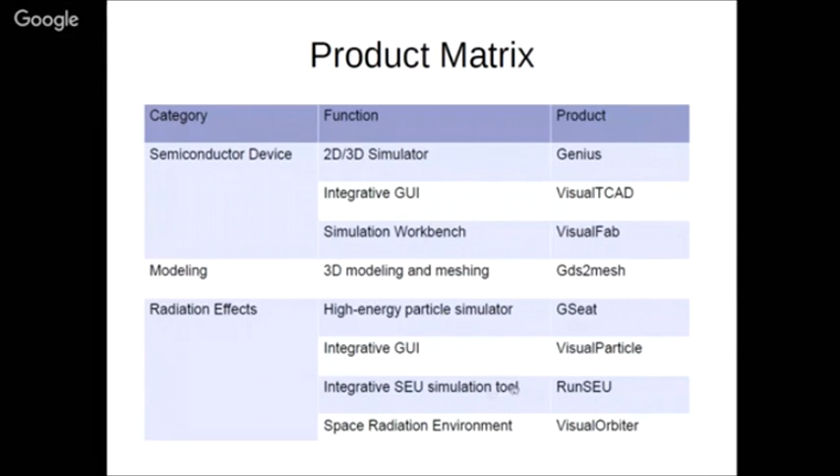What does this tool do? Basically, this tool will model your device or circuit in 3D, like this.

Hello, yes, this is Naresh Kumar from SGT University, Gurgaon. Sir, there is some technical problem, I think. Your voice is disturbing, and similarly the video also has some disturbance. Sir, please reload your session—right-click and reload it. Just a minute, ma'am. I think the mic is the issue. Okay.

Now, basically, GDS2Mesh is a 3D modeler software. It basically provides an environment where you can model a single device as well as a small circuit in 3D.

Like this is one example. Here our tool requires a layout—this is a mask file. This layout file is required as an input file. Customers are free to design the layout in any layout software. We are also providing a layout software named Layout. So you are free to make your layout in this tool or any standard tool.

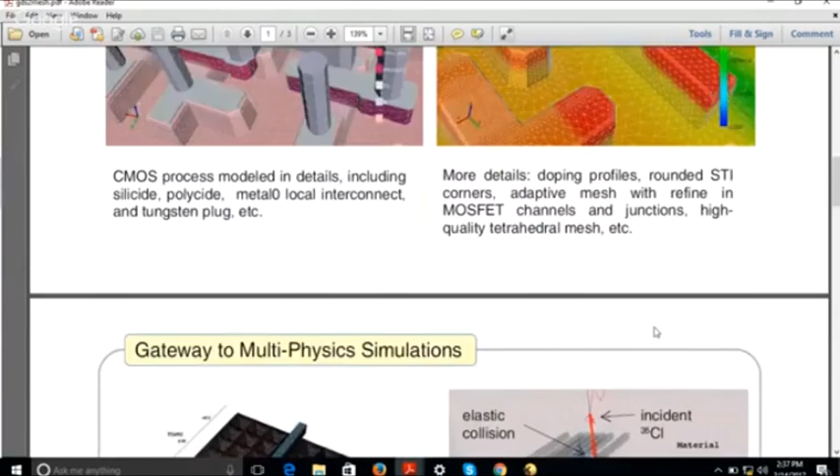You are free to see all types of doping profiles. You are free to fabricate any semiconductor technology, like this large solar cell structure, 300 by 300 micron, made of silicon with bus bars and having a textured surface.

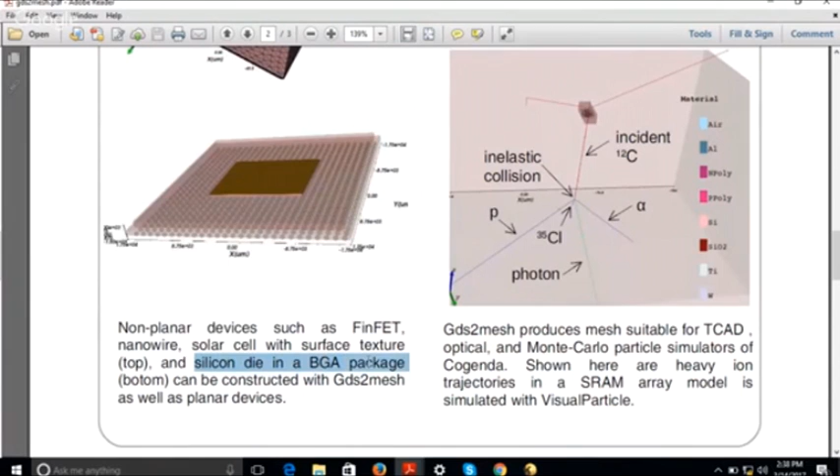Then you can also model the package, like this silicon die in a BGA package. Plus this is again a larger circuit in terms of TCAD, having 24 transistors. If we make just a layout, it's a very small circuit, but when we model it in 3D, it creates a huge number of mesh elements.

Then this is an image sensor with a photodiode. This portion is the photodiode portion, and these are the three-transistor image sensor, basically a 3T image sensor. This is a complete pixel.

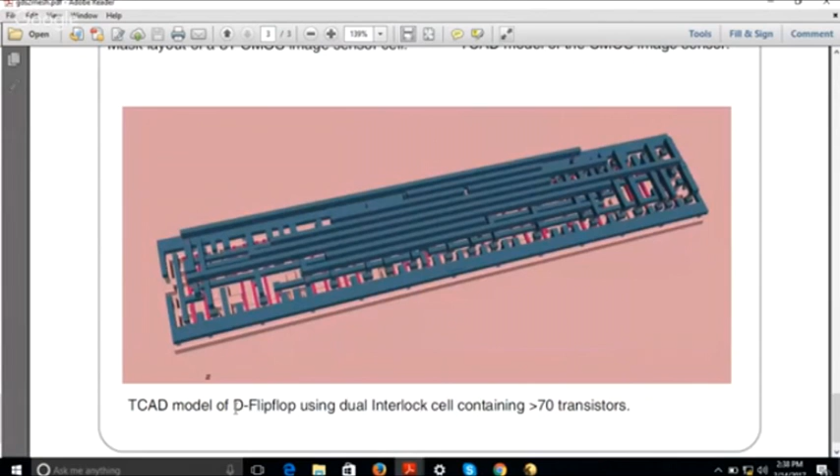Then this is again a large circuit with dual interlock cells having more than 70 transistors. So basically this GDS2Mesh module is used to model any device and circuit in 3D.

Then we have a radiation effect environment. Using this environment, we can make our semiconductor devices radiation hardened, so they can easily be used in space as well as in biomedical or any radiation-hardened application based requirement.

Now in radiation hardened, we have a simulator called GSeat, a high energy particle simulator. GSeat works in a graphical user interface called VisualParticle. Then we have a Monte Carlo simulator for radiation called RunSEU. And we have a space radiation environment tool.

Once we do a radiation hardened simulation, we require some data, like what kind of particle we want to fall on our device. Where do we get that data from? Basically, we get that data either from some customer or from some real life environment, or we require some source to get that data.

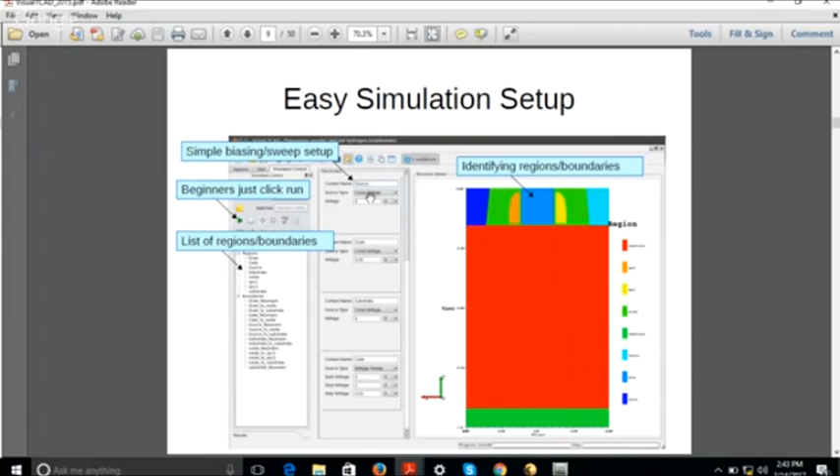This is one of the windows for NMOS simulation. We first fabricate or draw this NMOS structure, then load this structure into a simulation environment. In the simulation environment, we set up the electrode biasing and what type of simulation we want to perform. Accordingly, we apply biasing here. Then once we click on simulation, it starts and gives the results in this format.

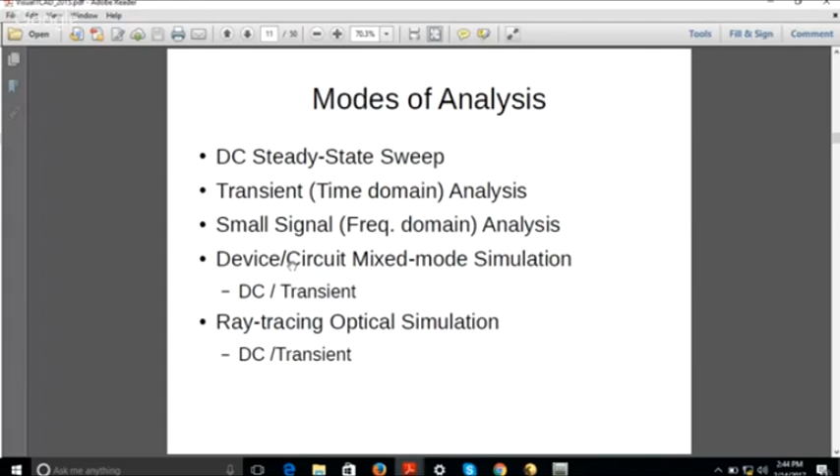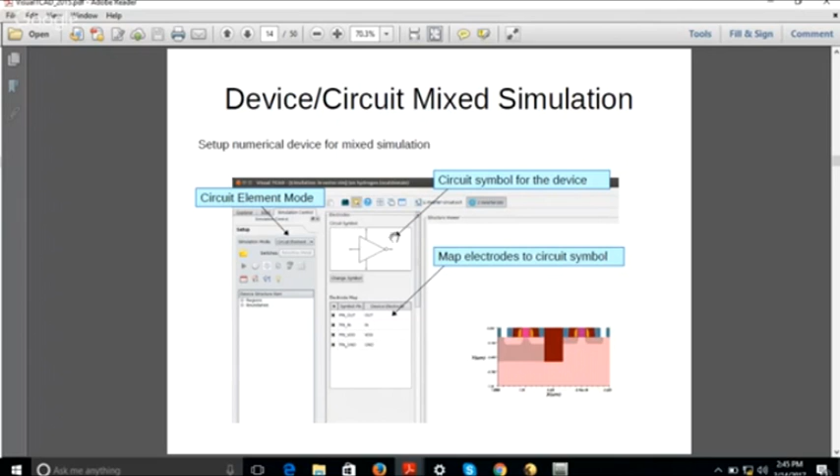Once we are assured that the device we have designed is working perfectly as per our requirement, if we want to use that device for device and circuit mix simulation, we have an option. Whatever device or circuit we fabricate, like this inverter we have designed, we just convert our own designed device into a symbol. We can create our own symbol library and then call this symbol for mixed mode simulation, meaning here we are using our TCAD component or TCAD device plus other active and passive SPICE components.

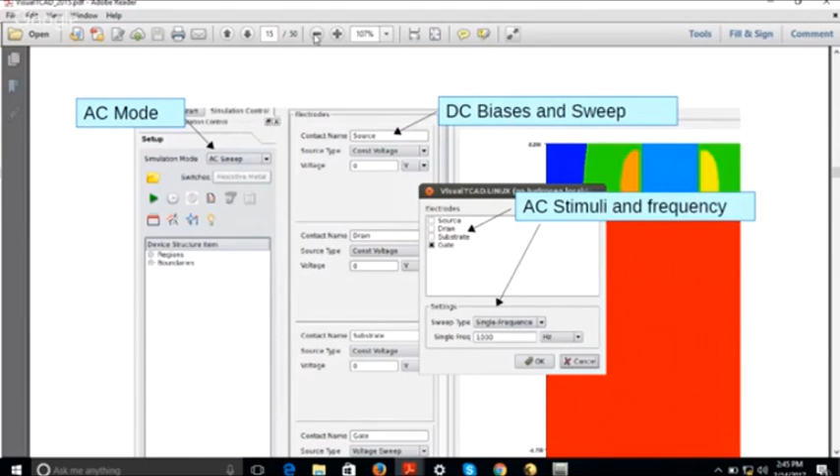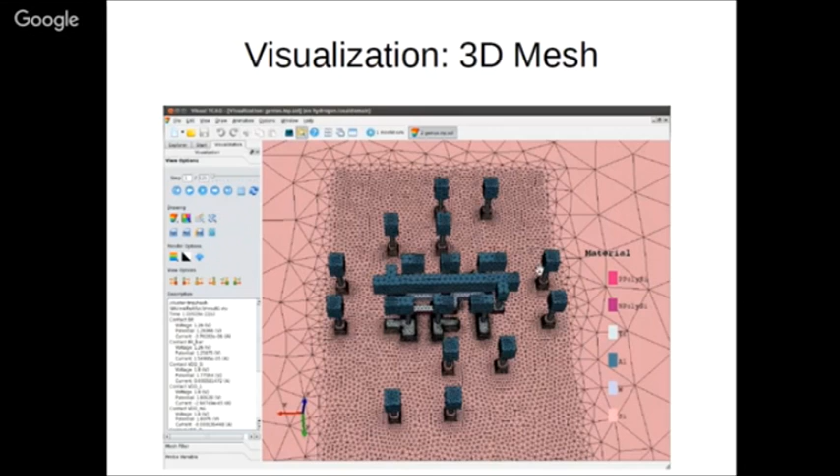This is a top view of an SRAM structure with, we can say, well contacts. These are the well contacts. If I show you this structure, it will look like this. I just remove the oxide, hide the substrate, and show the substrate. This is the SRAM structure after fabrication.

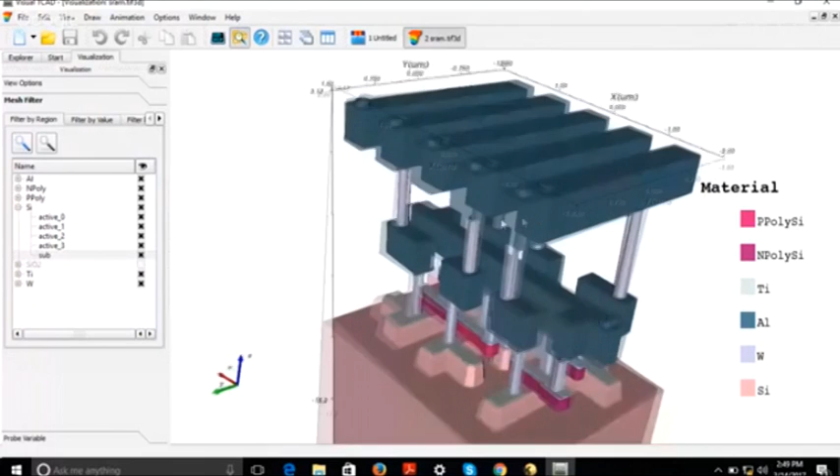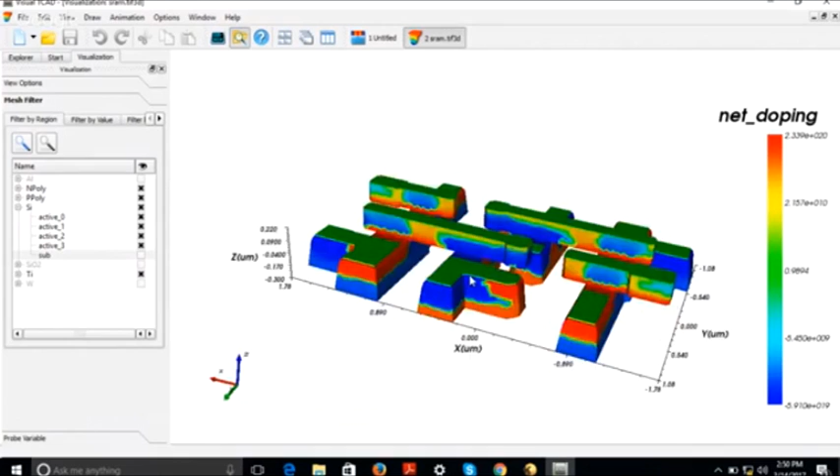If we remove the interconnect lines and pads, remove the metals, contact - now this is the simple SRAM structure without, I have hidden, just a minute. This is the simple fabricated structure for SRAM.

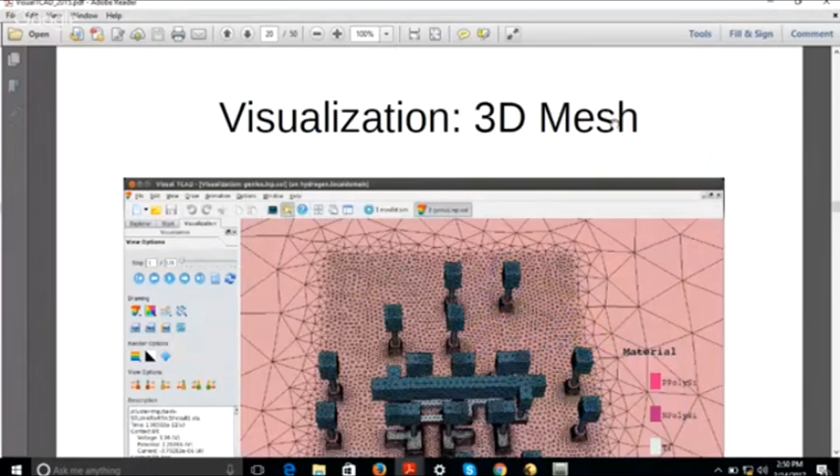Acceptor type and donor type. So this is the same structure with the well contacts. This is a cross section view. All this type of shape you can easily take from the simulator.

And here you are free to design your device either using the GUI method, graphical method, or by using a scripting method. This is the way we write a script. We write a script in a text document.

Then whatever results we get, all the results are in form of a spreadsheet. Now it's up to our requirement what we want to plot and what we require on the x-axis, what we require on the y-axis. Accordingly, we just select the columns and plot from the spreadsheet.

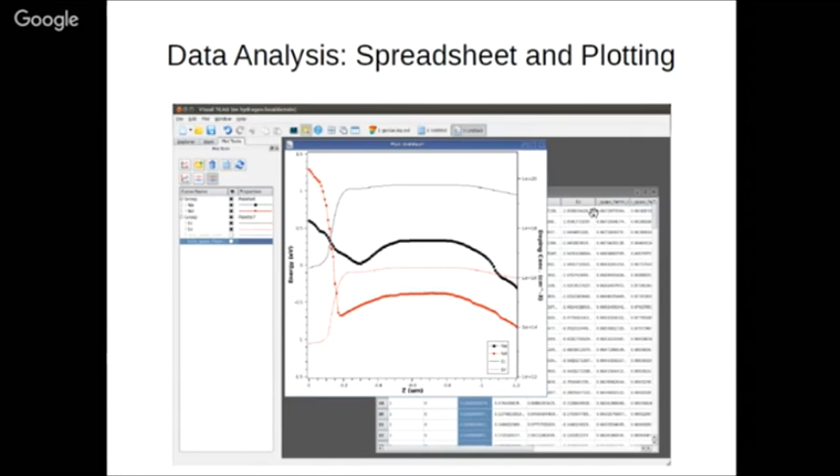I'm just skipping a few of the slides - that one is related to radiation hardening.

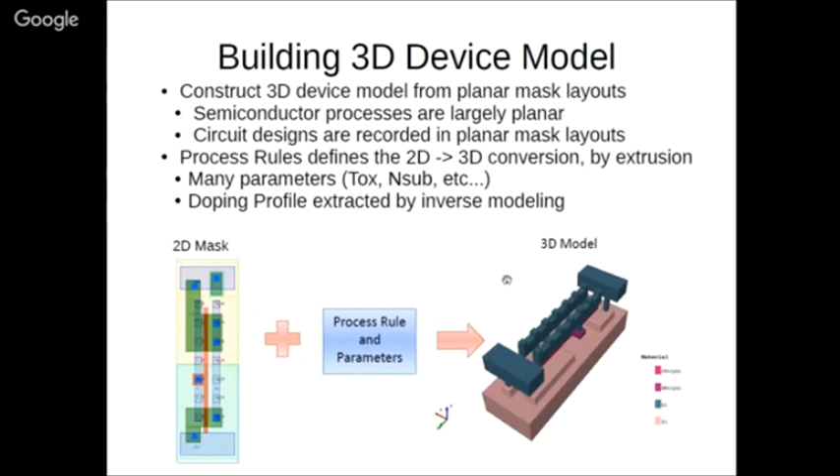Now the GDS2 mask I have already explained here. What we have done is we created a mask. This mask we can create using any of the software. Then we write a process rule, and the software will implement those process rules on the mask and develop a 3D structure. How does the software do this? The software basically considers the mask, the layout, as an XY plane, and then extrudes in the Z direction as per the process rule. As per the process rule, we just extrude in the Z direction and make the object in 3D.

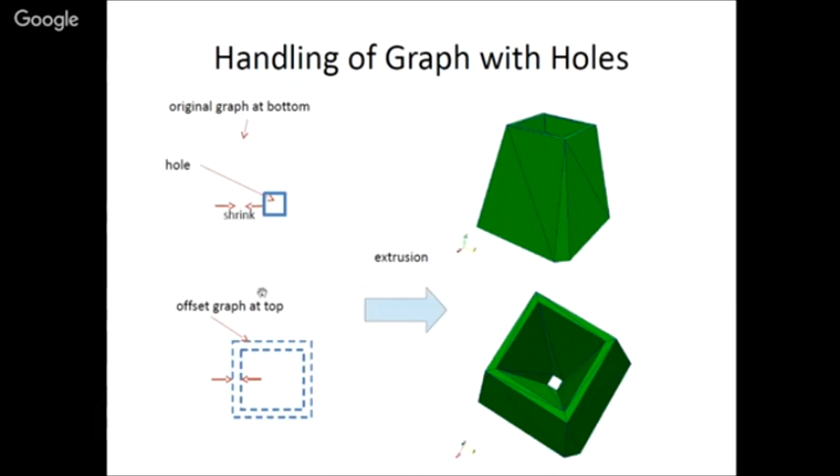Like here, this is a shrink and expand feature, so it supports all types. This is a different type of etching feature, isotropic and anisotropic etching feature, using the shrink and expand feature only.

This is a GUI. In this GUI, on the top we just load a process file - different process files we load here - and then we select the process file, select the process parameters, and then we give a mask file. In this option we provide a mask file. Then whatever process we select here, we get all the process parameters here, like it's showing here: Lambda means design rule length, thickness of the substrate, thickness of STI, thickness of oxide, thickness of poly - all these process parameters are visible here. If we want to change, we just double click here and change.

If I show you the live image - this is live. Whatever we want to change, we just change in GDS2 mesh.

Then whatever layout we give as an input file, the software reads that layout. The software reads each of the mask layers available in the layout, and then once we click on generate mesh, the software will generate a 3D structure like this.

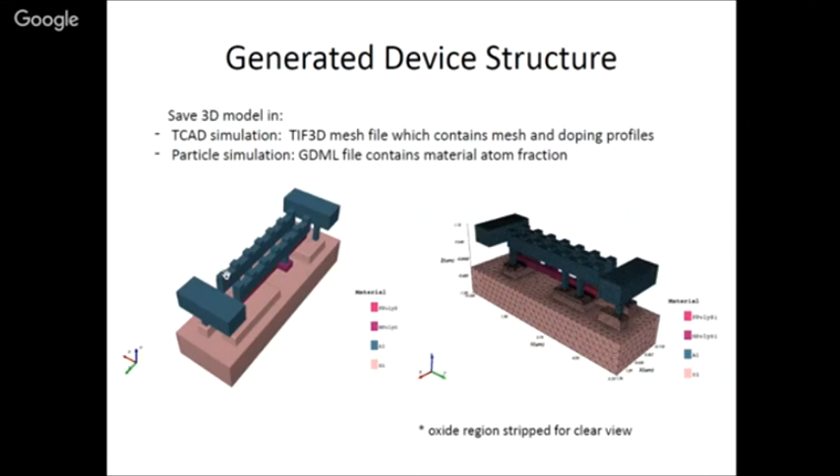You are free to make any of the 3D circuits like inverter, SRAM, D flip-flop, whatever circuit you want to make. Every circuit you can fabricate in 3D here in this environment.

Now, what I will do before starting this session - I just want to show you some of the device galleries. Before starting our live demonstration, I just want to show some of the device galleries that you can easily design in the TCAD environment. Like this is one of the SRAM.

This is a simple PN junction diode. Starting from the PN junction diode, you can easily create it. Then comes the BJT, the bipolar junction transistor. This bipolar junction transistor is the same structure I just want to show you.

Then from MOSFET, this is an inverter. This is N-type MOSFET, this is P-type MOSFET. This green portion is a well, and inside the well we make the P-type MOSFET.

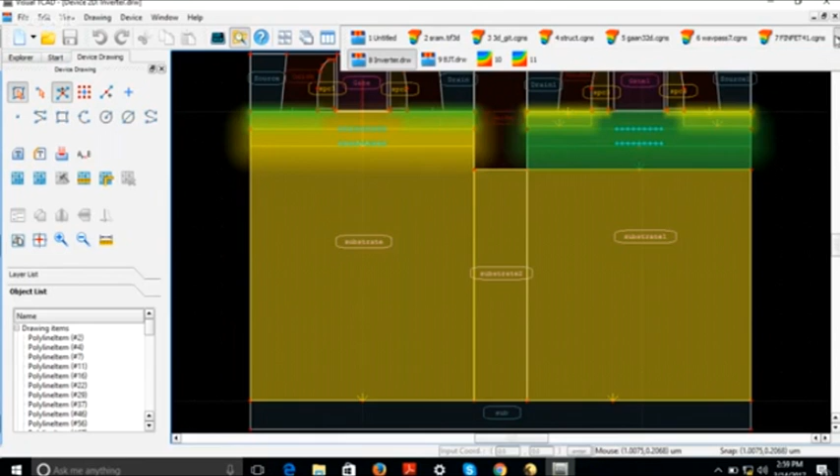From PN junction, MOSFET, BJTs, to CMOS, then we can move to advanced structures like this FinFET. This is one of the FinFET structures, an SOI FinFET.

If I remove the side layer, this is a FinFET structure. This is a tri-gate FinFET structure.

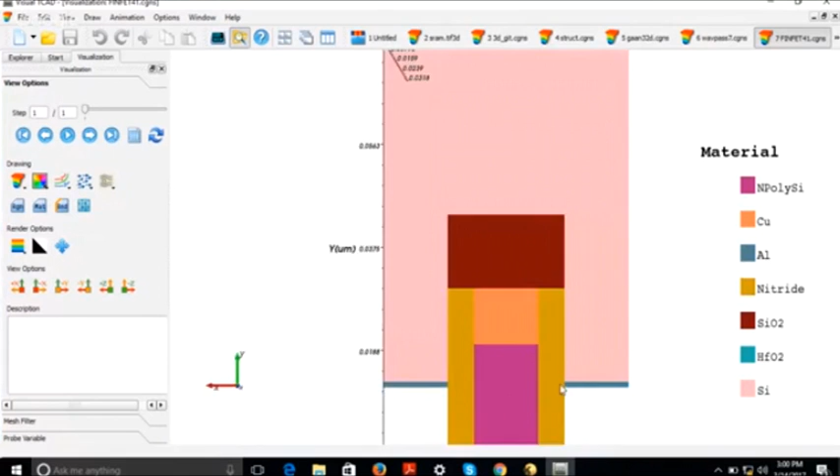Then we can make advanced FinFET, like this stack gate metal stack. This FinFET has a bottom gate of polysilicon and top gate of copper. This is gate stacking.

If I remove the nitride part, and hide this part also with metal, you are able to see this blue color is high-K dielectric, that is HfO2, and the bottom gate is of polysilicon while the top gate is of copper. So gate stacking we have done.

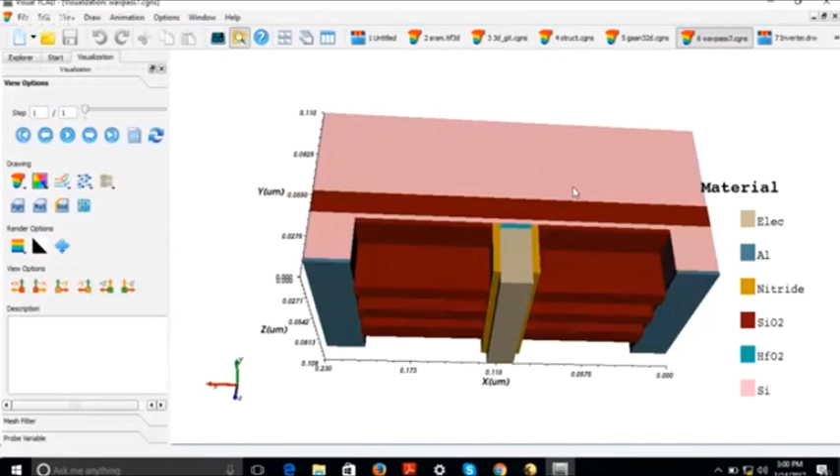Similarly, we have an advanced structure with multi-fins. This is a multi-fin structure, multi-fin with ultra thin body. This is a very thin body.

If we remove the oxide part, this is again an SOI structure. You are able to see these are the three fins, and this is the very small UTB, ultra thin body, along with the fins.

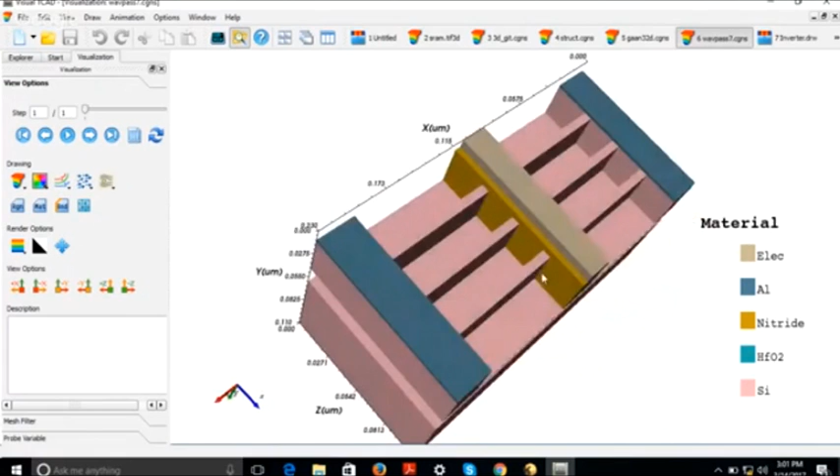If I remove the nitride also, we are able to see the gate electrode with gate oxide. The gate oxide material is HfO2 again, high-K dielectric.

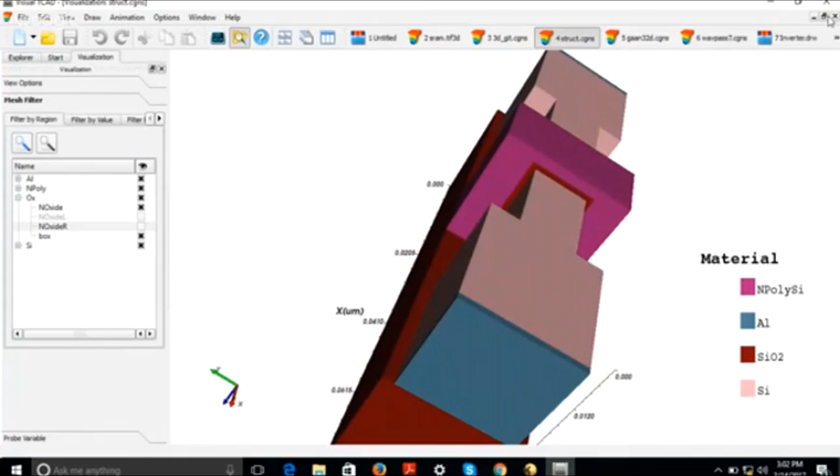All these types of advanced MOSFETs we can easily design here: this FinFET structure, this gate-all-around structure, the ultra thin body FinFET, multi-fin FinFET, and this simple MOSFET in 3D, a simple MOS structure in 3D.

And then the advanced CMOS based SRAM I've already shown. Now I'm showing you an advanced SRAM structure. This is a FinFET based SRAM SOI device. If I remove the oxide part, the surface passivation layer, this is the FinFET.

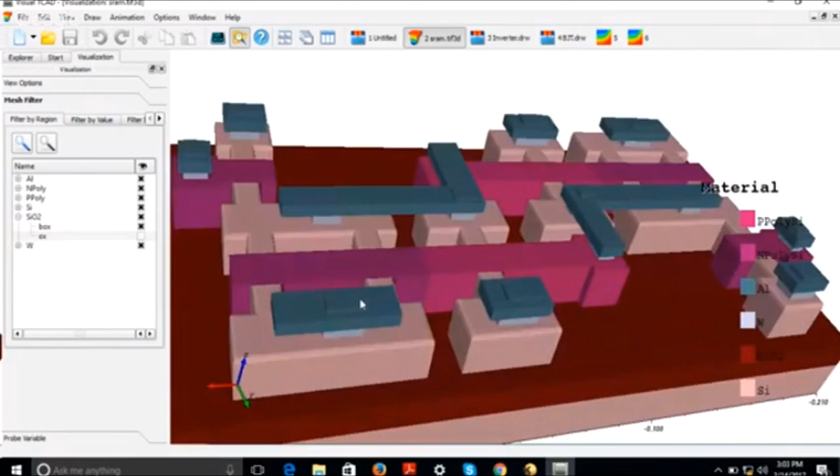You see, this is the fin tri-gate. This is a FinFET based SRAM structure.

So here we are giving an environment where you can work on any of the technology, traditional technology, older technology, or novel structures, from PN junction to any of the advanced structures.

Now in this demonstration, I will make one NMOS structure and then simulate its IV characteristics, then save that NMOS structure in the form of a symbol, and use that NMOS for circuit simulation. Meaning, I will do a mixed mode simulation using CMOS.

First of all, in this work area, we create an NMOS structure. This plus sign is the center coordinate. Now I just take a rectangular box from the device drawing options shown on the left hand side, and make a rectangular box like this.

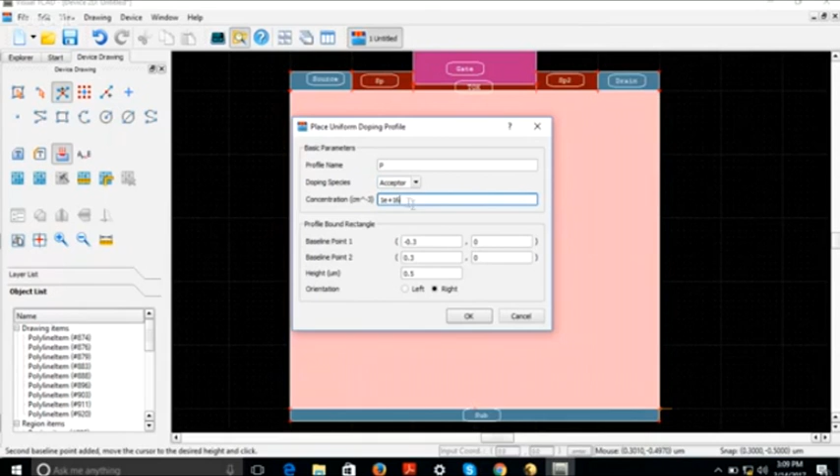We select the silicon, we add uniform doping, p-type, we give some name, then acceptor, concentration 1E16, and add the doping.

Now once we add the doping, if we again show you the opaque mode, it will be like this, yellow color, meaning our silicon is uniformly doped.

We give the name VT, doping species acceptor type only, depth 10 nanometer. This we call VT implant layer.

Then we add lightly doped region for making source and drain. We first select this portion, Gaussian, LDD for source doping, any name we can give here. Donor 1E18, junction depth 5 nanometer.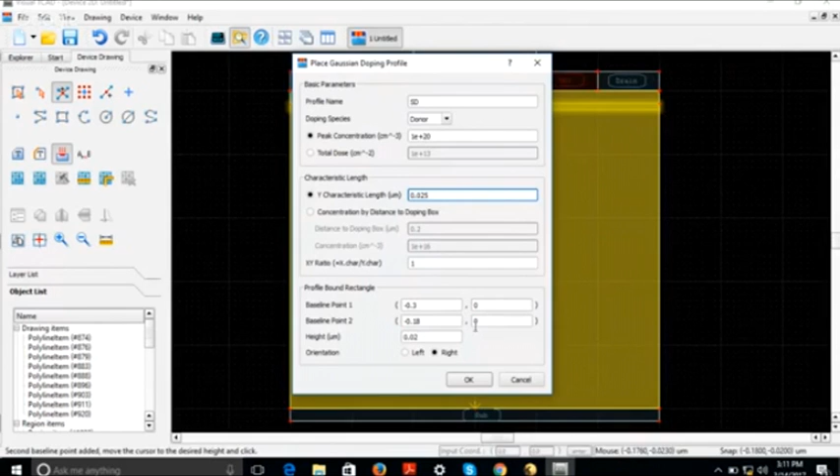Similarly, we repeat this same values for drain because source and drain both are identical in MOS technology. LDD for drain doping, we select the donor 1E18, junction depth 5 nanometer. Drain doping, donor 1E20, junction depth 25 nanometer.

Now our doping is done. We save this structure, create one folder, NITTR. We save my MOSFET, give the name, whatever name you want to give, you are free, just give it my MOSFET and save this file.

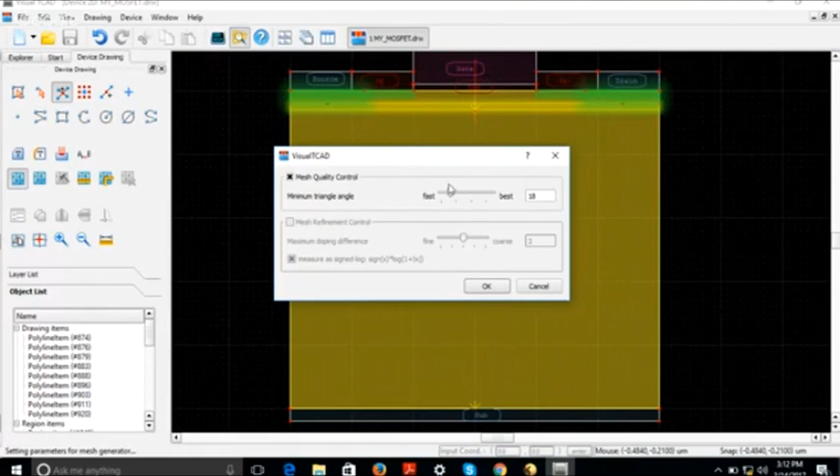Then software will automatically make a mesh. Once we click on do mesh, we want best mesh, software automatically makes a mesh like this.

I open magnifier. Like this is the mesh, it's visible there.

Now once we click on this option, do refine mesh, then software automatically refines the mesh from the PN junction. We again click refine mesh, best mesh. We repeat this task for 2 times.

Now what is the impact of this? The impact is this: see, the mesh is refined from the junctions, means at the interface. From every side the mesh is refined.

Now our device is ready. We just save this device. We click device, save mesh to file, we give the name MOSFET N, click on save option.

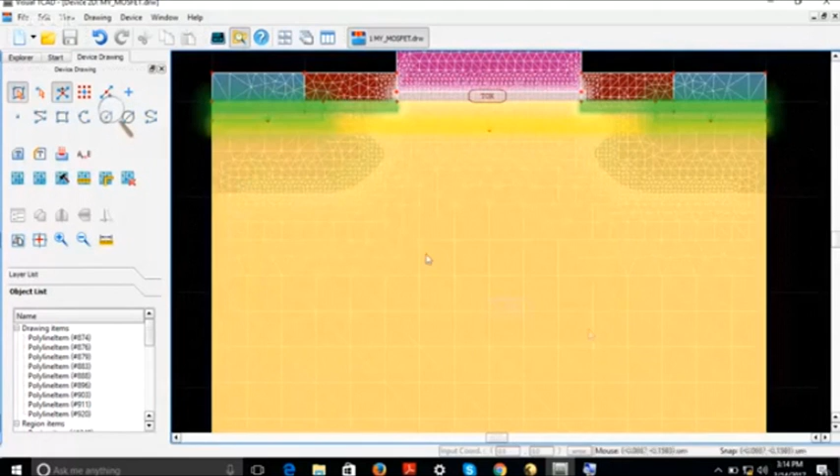Then we open this, we open our file MOS. Change the panel settings. Our MOSFET is ready. Now we just open the doping, net doping.

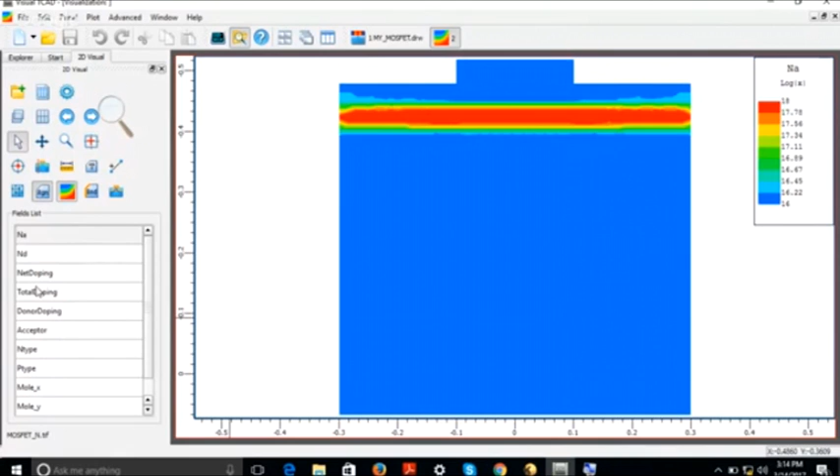Now this is our device. Want to see the mesh? We click here, this is the mesh. See, it's refined from the PN junction regions.

Now we want to simulate this device. For simulation, what we do? We click on File, New. Previously, whatever we have done is in device drawing, and this output we have opened in 2D visual. Now for simulation, we open device simulation.

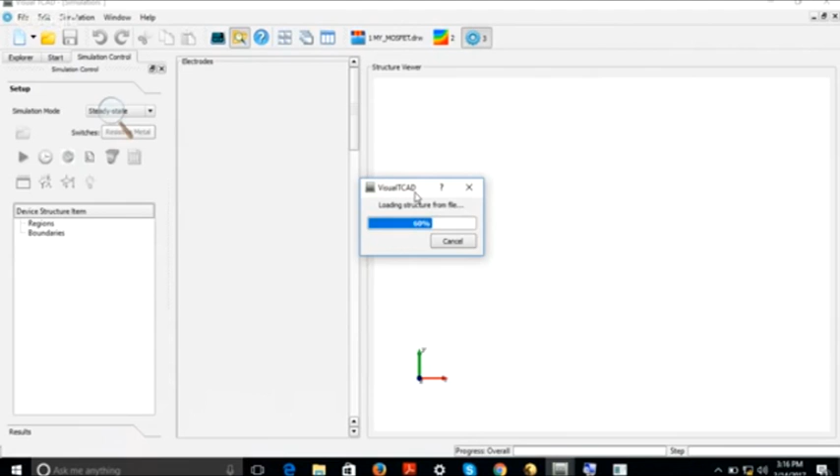In device simulation, we just load the device, whatever we have designed. Minimize this black window. It will take some time depending on the mesh. Okay, start loading. Now our device is loaded here.

This different color shows different regions, these are all the regions, there are different regions. Now want to see the material? We click on material, now this is the material.

Now what type of simulation do we want to perform? Accordingly we apply biasing here. Like if you want to perform ID VG simulation, for ID VG simulation, can I use this board? Yes, I need marker, so what keyboard is it? Black, black.

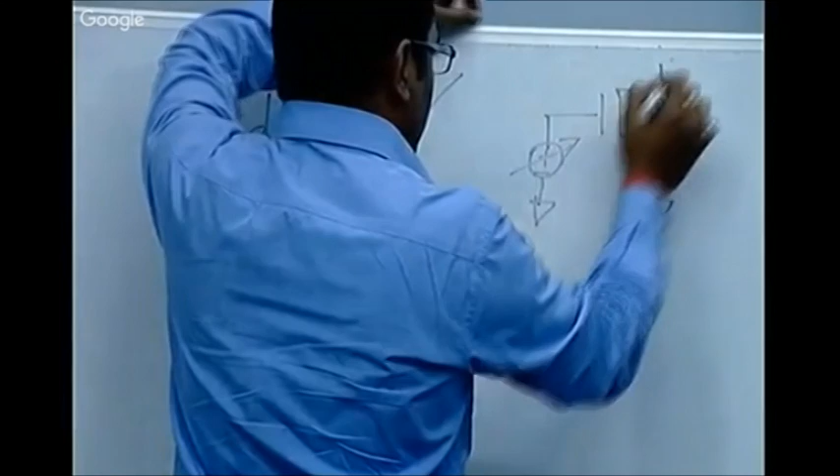For ID VG simulation, we simulate by ramping the gate voltage and checking the output, which is ID, the drain current. For this, we apply a constant voltage of 1 volt and ramp the gate voltage.

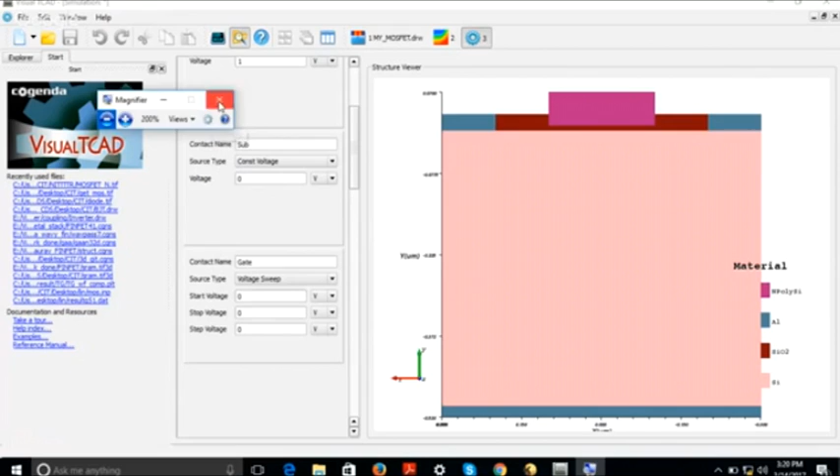Now, 0 to 2 volt in steps of 0.05. Save this structure, MOSFET, and then I'm just taking the default settings.

This is a window for boundary conditions. These are the different options. This is a window to change the models. Currently I'm taking the default model for this MOSFET simulation.

Now if I run here, run, it asks for a folder. I just select this folder, NITTR folder, and the simulation is submitted.

This black window shows the simulation is submitted. We get the option simulation job submitted. Now we click OK. On the left hand side bottom, we get the results. And this is a window to check whether the console is running or not. The option is available here to check the console.

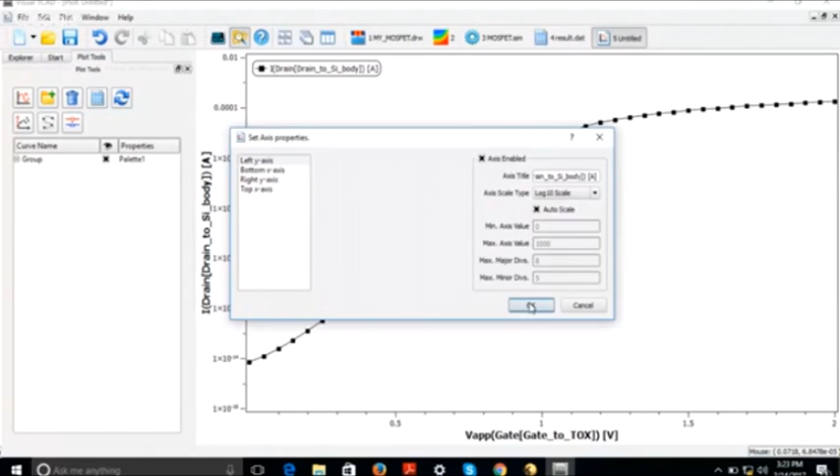This is a linear scale. If you want to change the scale property, select here log scale. These are the log results. For plotting, we have advanced tools also, so there is no need to use Origin or any other tool.

We ourselves have a very advanced feature for plotting, like this is one of the features for plotting. Now the other feature is, if you want to plot the same results, I just close those results and open these results in 2D visual. I open 2D visual and say load file.

We select here .dat, we select results, and now these are the results. Then we click on the edit plot option. Here we choose what type of plot we want: Cartesian, polar, Smith chart, data coordinates, whatever type of plot we want. Accordingly we select. Now curve plot, create.

On the X-axis we require gate voltage, so we select gate voltage. On the Y-axis we require drain current.

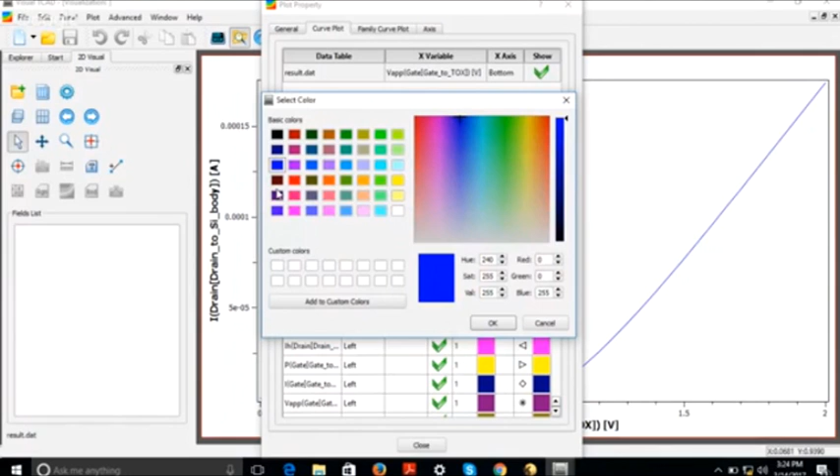We just change the color, change the symbol, increase the size, and so on. Then if you want gridding, we can show the grid, a finer grid, and then log scale.

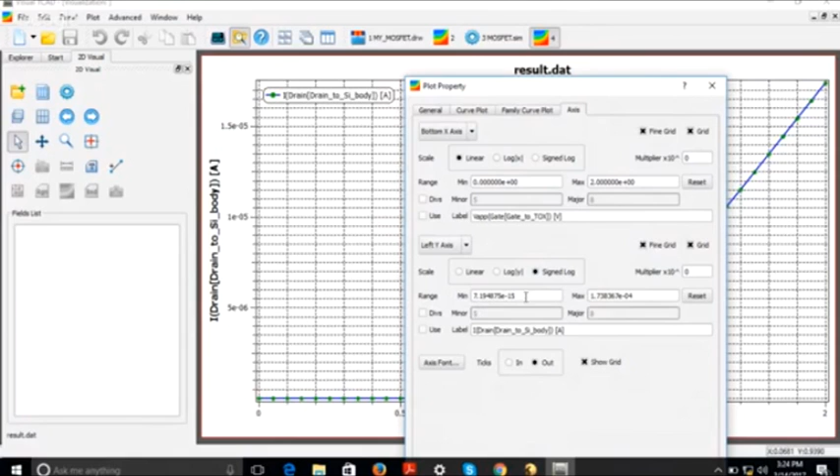Okay, to refresh it. Wait. Then there is an option, all ticks are outside; we have to make the ticks inside. Now all ticks are inside, like these ticks. So these are the plotting tools.

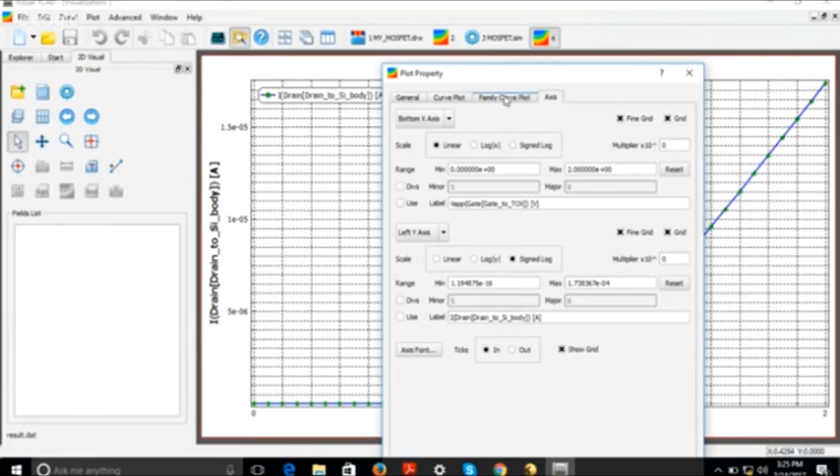I have to check the plotting option, it's not getting refreshed. There's some option, something is changing here, but that is not an issue. So from here we can also change the syntax, whatever type of syntax we require. Everything available in Origin is also available here.

Now, after simulation, if we want to see anything within the device, we open this device in visualization. Previously we opened the results in a spreadsheet; this time we are opening it in visualization, meaning we are able to see all these options within our device.

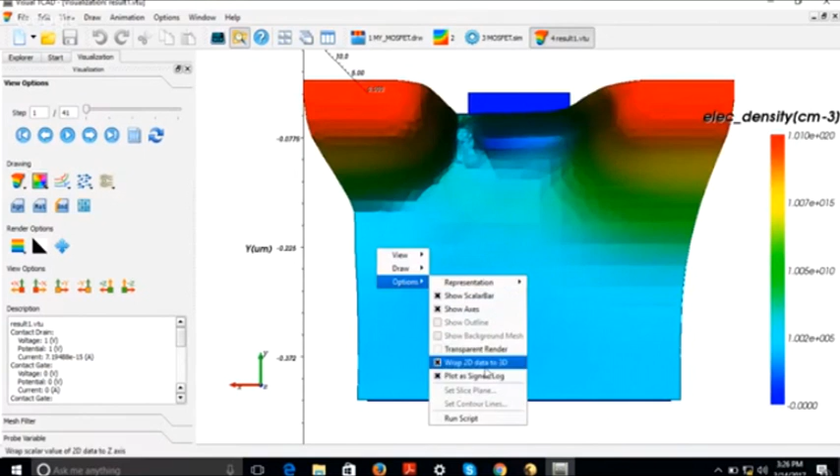Like if we see the electron density, this is a log plot, this is a linear plot. We see electron density is high in the source and drain region, but there is no channel in this portion. So once we play it, it will increase the gate voltage. See here, the gate voltage starts increasing, and once it increases past the threshold voltage, the channel starts forming. See, the channel starts forming.

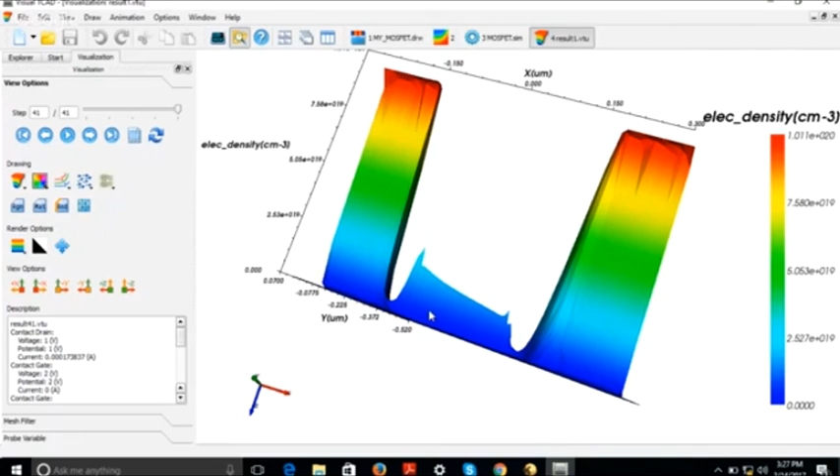The electron density starts increasing in the gate region, meaning the channel is formed. In this way, we are able to see the electric field, the current flow, everything is visible here. Recombination, everything is visible here.

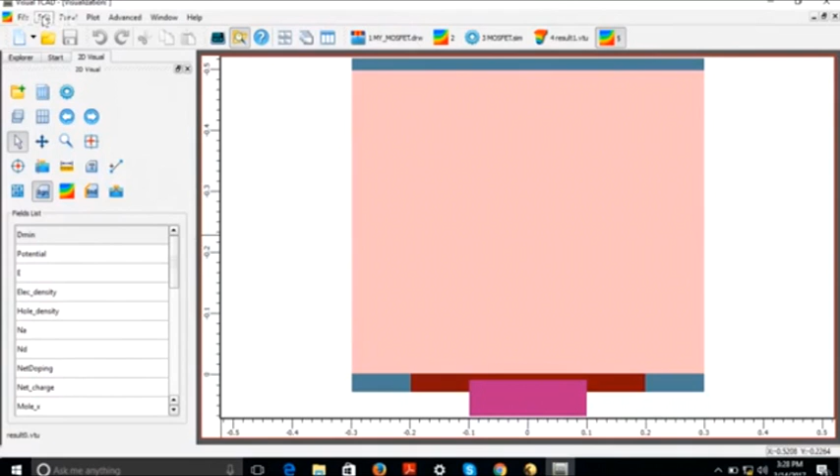Now, if we want to plot the conduction band and valence band at gate voltage 0 and gate voltage at 2 volt, for that we just open 2D visual again. Here we add the VTU 0 file, result 0.VTU, and we also open the 41 file. So these two files we open.

Now, in these two files, we select conduction band and valence band and take a cut line. We put a cut line in the MOS portion. MOS portion is gate oxide semiconductor. We put a cut line here.

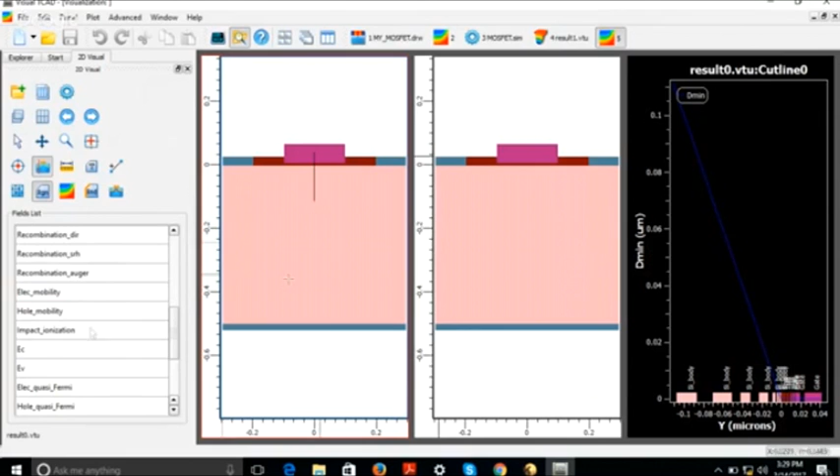We select this conduction band and valence band, then we put a cut line. This is when the result is at 0, and this is when the result is at 41. Now what I will do is select this, delete this, delete this, and try to merge.

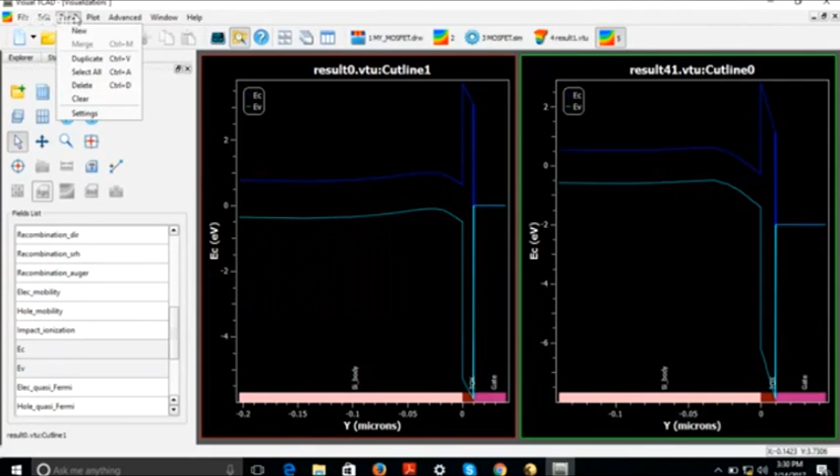We're able to see the difference in band bending at 0 and 2 volt. The blue line initially is when gate voltage is 0, and this is when gate voltage is 2 volt. The conduction band starts bending towards the Fermi level.

So in this way we are able to plot any internal variable of a MOSFET. Similarly, if you want to plot an electric field, I just delete it.

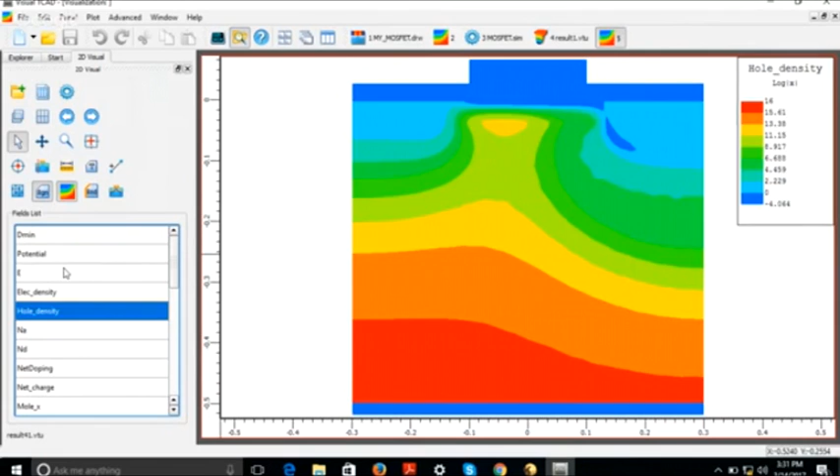Now similarly, if you want to plot an electric field, this is the electric field, this is the potential, electron density, hole density, everything. If you want to plot it, we just take a cut line, put an electric field cut line, basically electric field is more in the gate oxide region. So in the gate oxide region, I just put it, this is horizontally and this is vertically in both ways.

Similarly, the electron density or net charge, if we put, just remove this, in gate region, if we put a cut line, we are able to see the net charge. Any of the things we can easily plot: electron mobility, hole mobility, everything is visible and possible to plot.

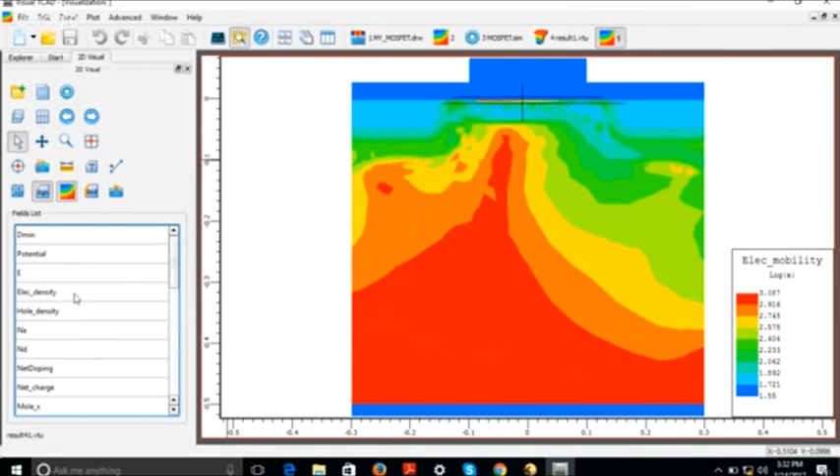And whatever we plot, if we require its data, like if we plot electron density and we require its data, we have an option here: advanced data manager. So here we get all this data, wherever we have put a cut line. We can easily use this data for whatever means, wherever we want to use it.

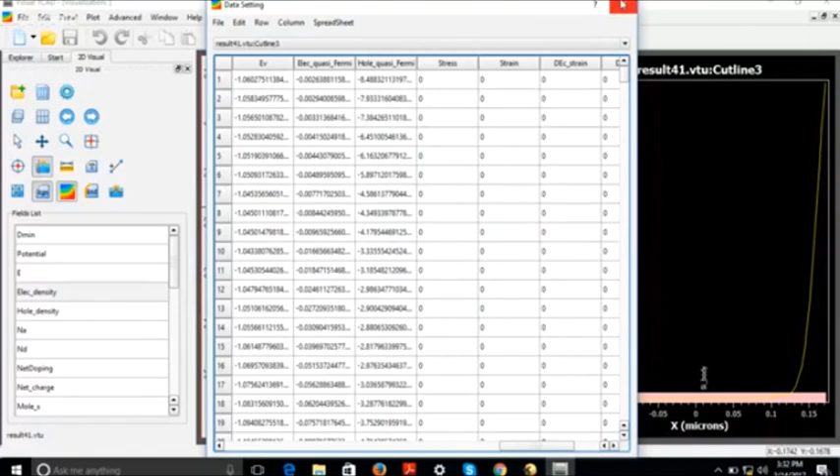Now what I will do, we have designed an NMOS, we have plotted its ID, its IV characteristics. If we want to plot its ID-VD characteristics...

If you want to plot its ID-VD characteristics, when VG is 0.5, when VG is 1, when VG is 2 volt, assume.

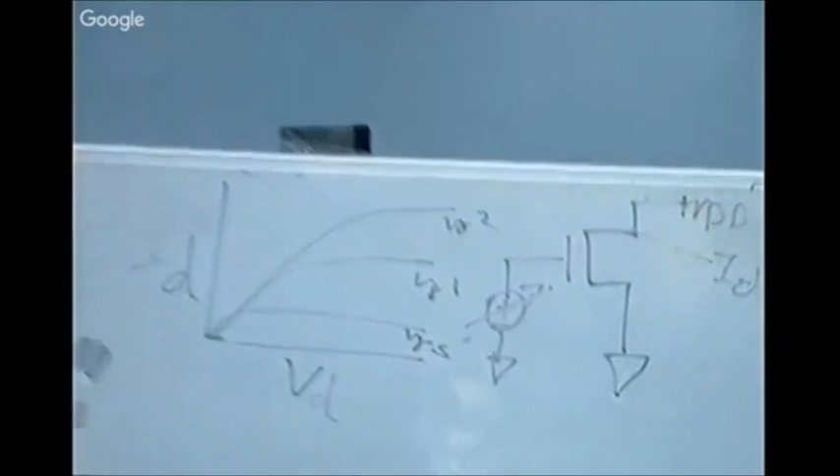So if you want to plot this, we have to perform the simulation, we have to change the simulation setup. Now what we do is change the simulation setup. For simulation setup, previously we ramped the gate voltage and our drain voltage was constant, but this time we make gate voltage constant.

We perform 3 different simulations as shown in the figure. For gate voltage 0.5, when gate voltage is 0.5, and gate voltage is 1, and when gate voltage is 2, we just sweep the drain voltage from 0 to, let's assume, 2 volt in a step of 0.1. Save it, we run.

It will take hardly a minute time to simulate for gate equal to 0.5. Now drain starts ramping from 0 to 2 volt in a step of 0.1.

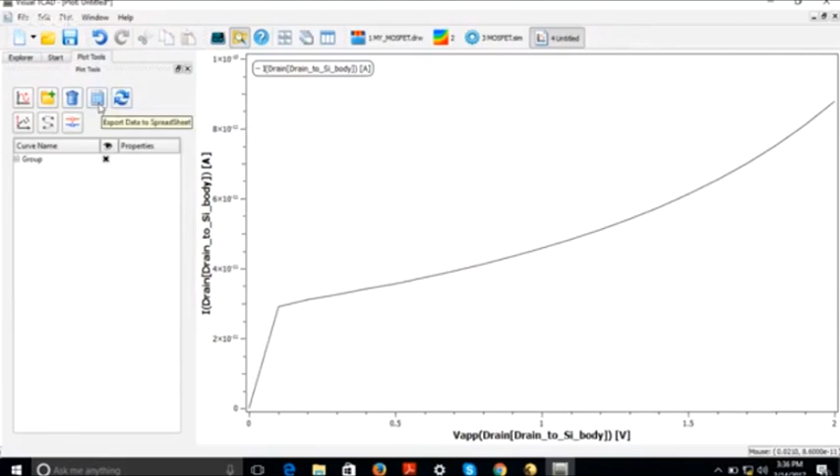After export, what do we get? We get a new spreadsheet. Why do we export? Because we have to change this column name. So before we change this column name, I just again run the simulation for gate voltage 1 volt.

I just increase the gate to 1 volt, save and run. Okay, running. Now by the time this simulation is over for gate equal to 1 volt, we just change the name, because we require the same for the drain current for different gate voltages.

So we give here the name: drain current when VG is 0.5 volt. Now we again plot the new results. This is the new result.

We again copy this new drain current and paste it here in the adjacent column. We copy and paste here, again change the name, Control C. Now this is for 1 volt, gate equal to 1 volt.

Close. We again run when gate is 2 volt. To start, now this time it will ramp gate for 2 volt.

Now start ramping the drain. This simulation will be complete. See here the drain is ramping, it's about to finish. Now this is finished. We again copy the drain.

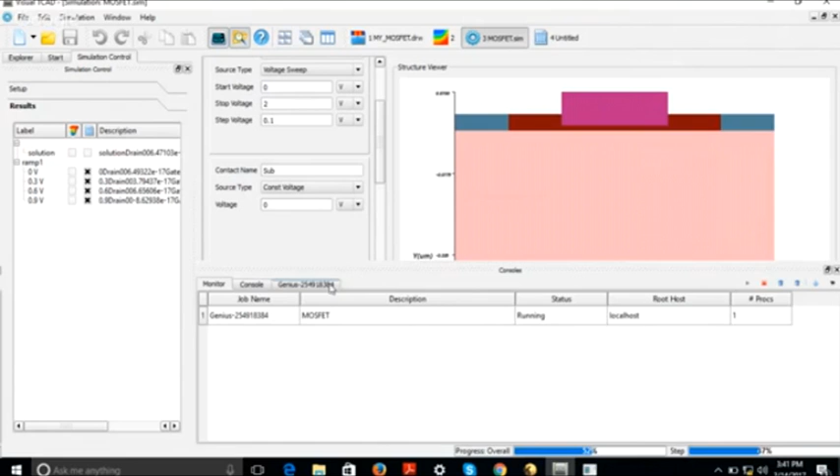This remains okay, gate voltage 1.5. Again run this. Now start increasing the drain. We open the spreadsheet again.

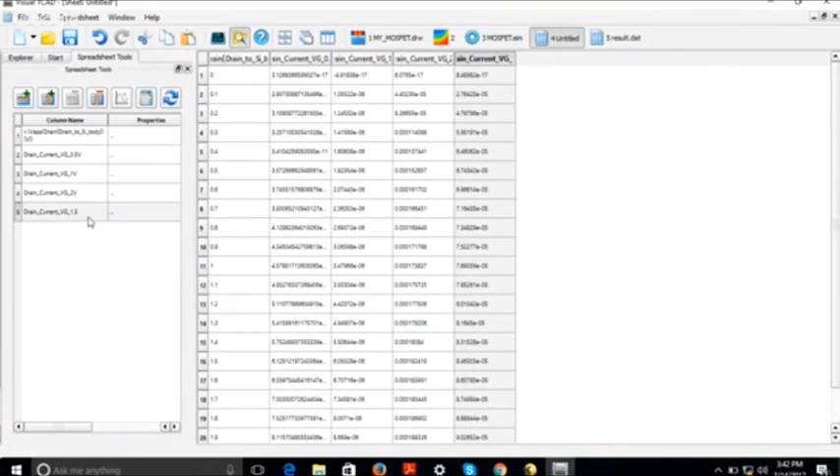Now if you want to perform a mixed mode simulation for the same device, we convert this device into the form of a symbol. To convert it, we move back to the setup environment. Here we change the simulation mode to circuit element. Now we change this symbol for N, whatever symbol we want to select.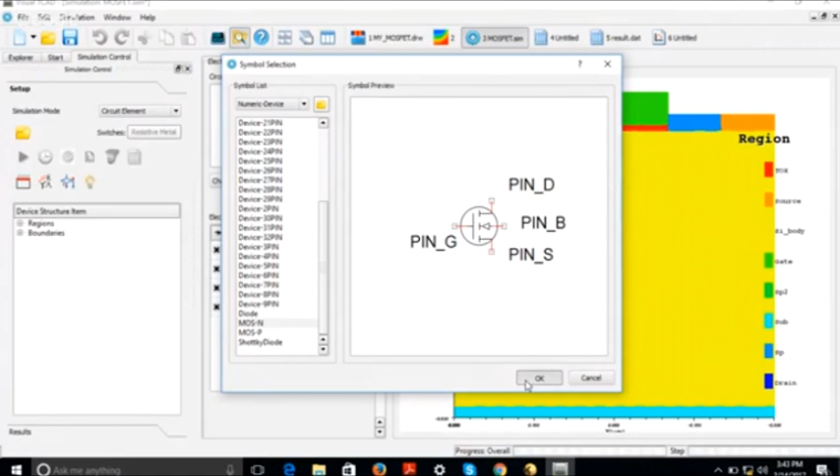This is a customizable library. We are free to customize this library as per our requirement. Now we link the pin S with source, G with gate, D with drain, and B with the back electrode substrate. We save this file.

This file is MOSFET.sim. We save this file and then call this file in circuit schematic. For mixed mode simulation, we open the circuit schematic option. In circuit schematic, we call our saved device, which we call the numerical device, MOSFET.sim.

Call this device. Mixed mode simulation means we are taking our fabricated MOSFET as a numerical device, and we are taking a PMOS as a library component, a SPICE component, from the library. This is the model. Now we make a connection using the wire. This blue one is the model and the black one is the TCAD component.

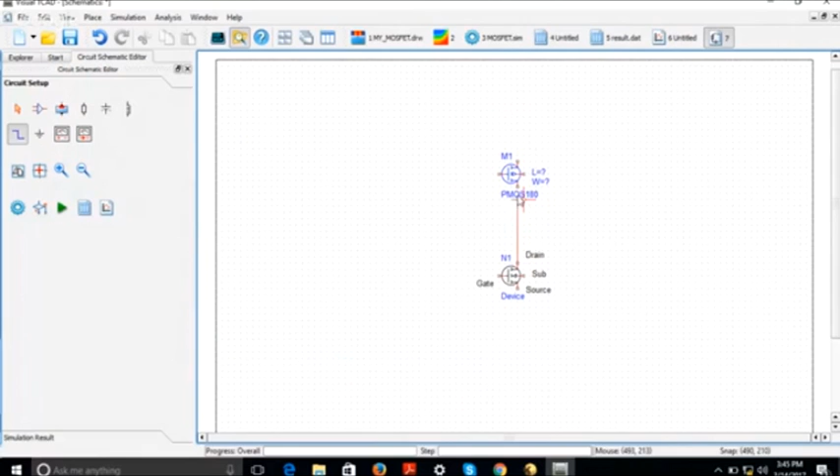Take a ground, take our source. For transient simulation, we take a pulse. For DC, we take DC. So I take pulse; we perform a transient simulation. For power supply, we take a VDC source.

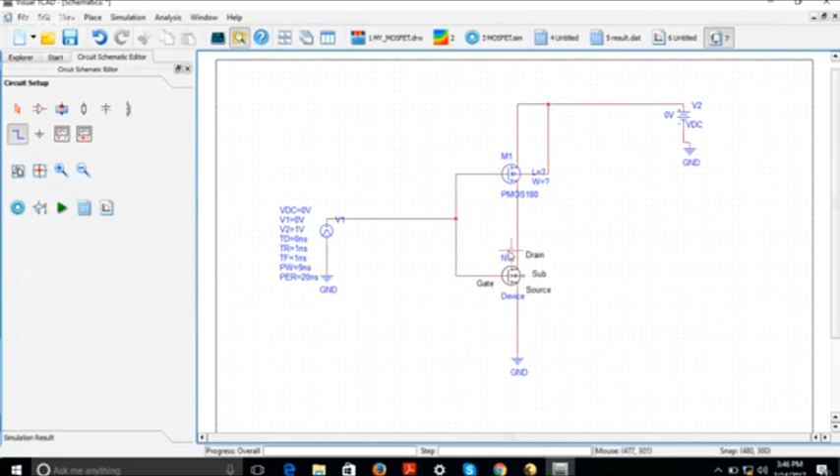Then we take a wire and make connections. Now this tool will work as a simple design tool like other tools work. The only difference is the component we are using is our own designed component. We are free to change its oxide thickness, dimensions, doping concentration, everything we are free to change. But here this is a 2D device.

For a 2D device, by default the width is 1 micron. I just want to show you the global parameter: by default width is 1 micron. So if you want to change the width, either we change it from here and save it, or accordingly we have to make our width.

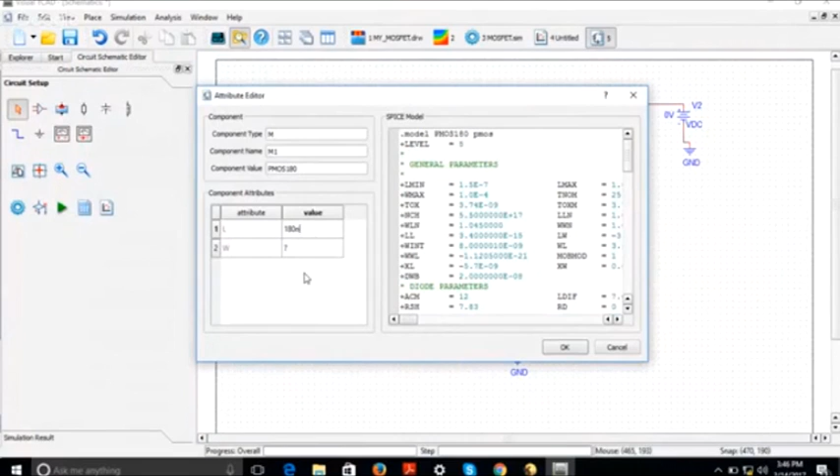Just close these old files. Now here for PMOS, we give 180 nanometer and width is 2500, because the PMOS width is normally 2 to 2.5 times more than NMOS. That's why, by default, width of NMOS is 1 micron, so we increase width of PMOS by 2.5 times.

Now we add a probe, a voltage probe, to see the results. This is our result. Now we apply a source of 2 volt to the input, and here apply 2 volt. We make a pulse with rise time 1 nanosecond, fall time 1 nanosecond.

Okay, I'm just reducing the pulse width. Pulse width I'm taking 3 and 1, 4. Total pulse width is 3, 6, 7, 8 nanosecond. Okay.

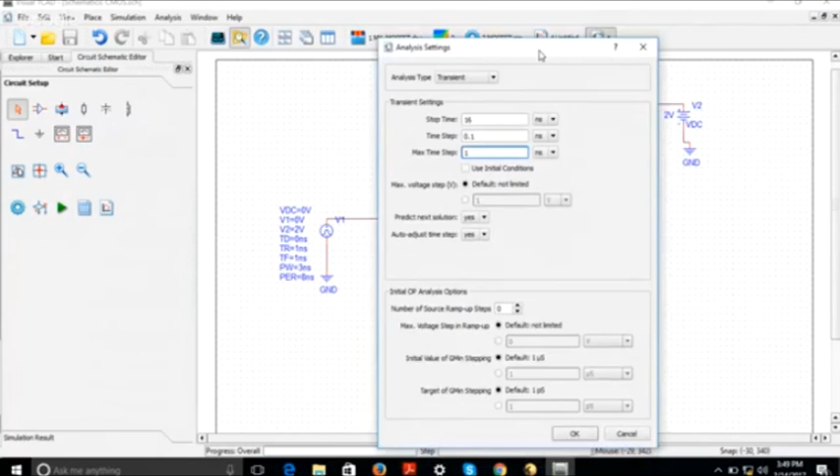Okay, save. Now we run this. Simulation submitted. We just minimize this black window. Simulation job submitted. Now we open the simulation results. See the console.

Now this time we are doing transient simulation. So what does it do? It first starts increasing the input, ramping the input pulse from 0 to 2 volts. So what I will do in transient simulation is show you both results, DC as well as transient.

Because when the input is ramping, if we plot the output at the same time, we get the DC characteristics also. So I just open the spreadsheet. Here my input is V1, output is probe1. So we select input V1 positive and probe1 positive.

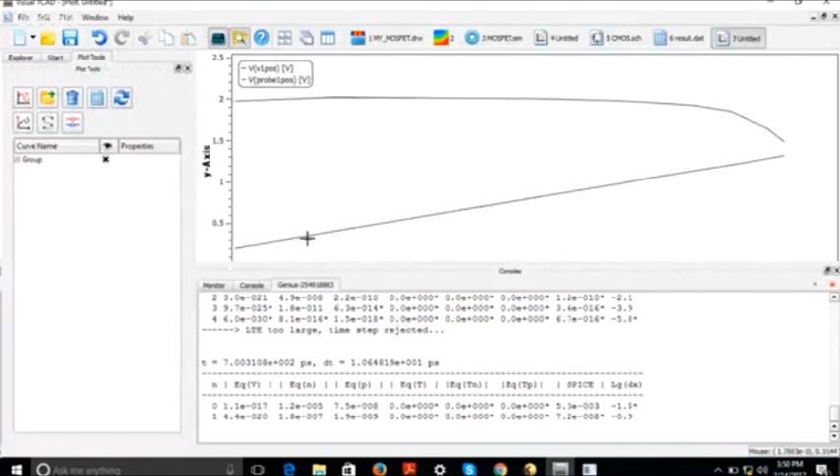Refresh - see, my input is ramping and output is reducing. Pink color is the output. Simulation is currently running, so I'm just plotting our results during runtime. See, input is ramping from 0 to 2 volts.

Okay, see the DC characteristics - this is almost the DC characteristics for an inverter. Just refresh - see the DC characteristics for an inverter. Now once the pulse is complete, we get the transient response. This is a kind of DC characteristics for an inverter.

Now let me update the simulation results. See, if we look at only this portion, when the input is ramping from 0 to 2 volts, this will be our DC. Now the simulation continues - the input is ramping again from 2 to 0 volts.

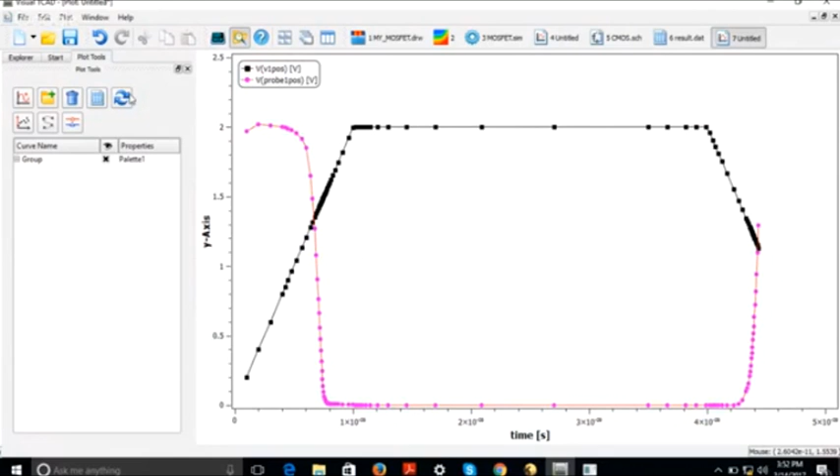Mixed mode simulation will take some time because we are doing transient simulation. Here, this is the log file. The simulation is running. Just refresh the result file and then refresh the plot file. See, from 0 to 2 volts and from 2 volts to 0.

Okay, almost one pulse completed. They have given a pulse of 8 nanoseconds. Now one pulse is completed. The second pulse will start after this. The second pulse started.

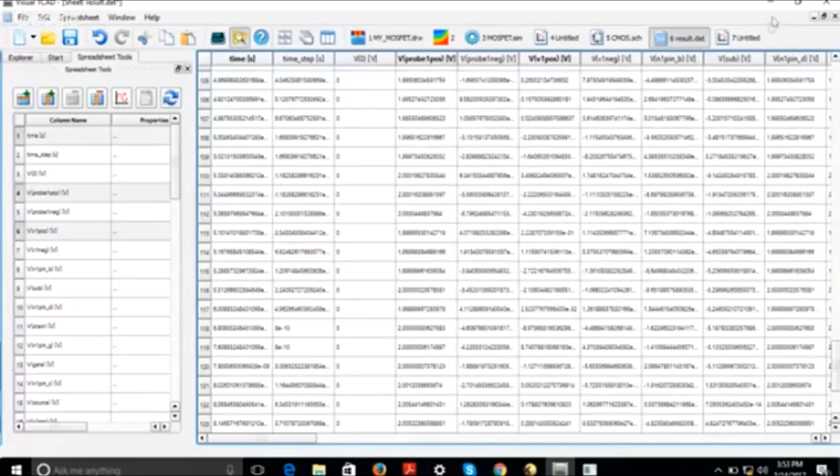See, the second pulse started and we are again getting - we are giving input 1, we are getting output 0. It means our inverter circuit is behaving properly. So in this way, we can do the mixed mode simulation.

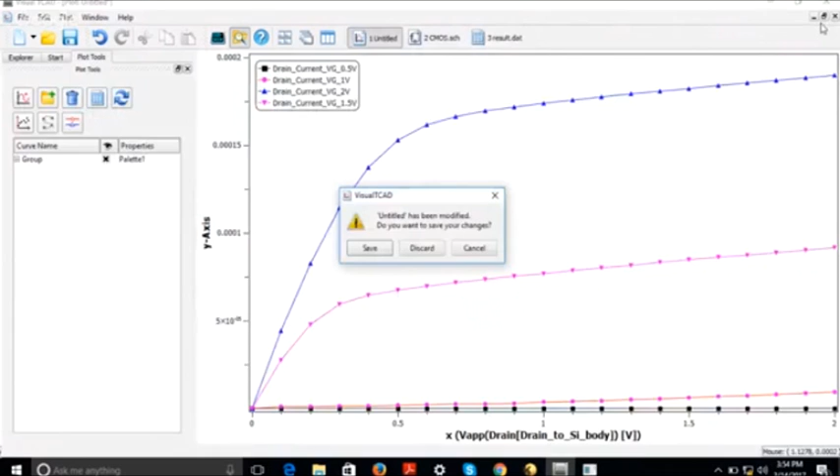Now I'm just closing this session. Before that, I want to show you how we design our 3D devices. There are two methods to design our 3D devices. If we want to design a single 3D device, this structure, this kind of FinFET structure or a nanowire structure.

Then we have to write a script. The script will be like this. We have to define mesh, region. In region, we have to fill different materials. Then doping information - we have to write a code like this. It's a device; this program we call device deck. Once our device deck is ready, we simulate it from this option, run as Genius deck.

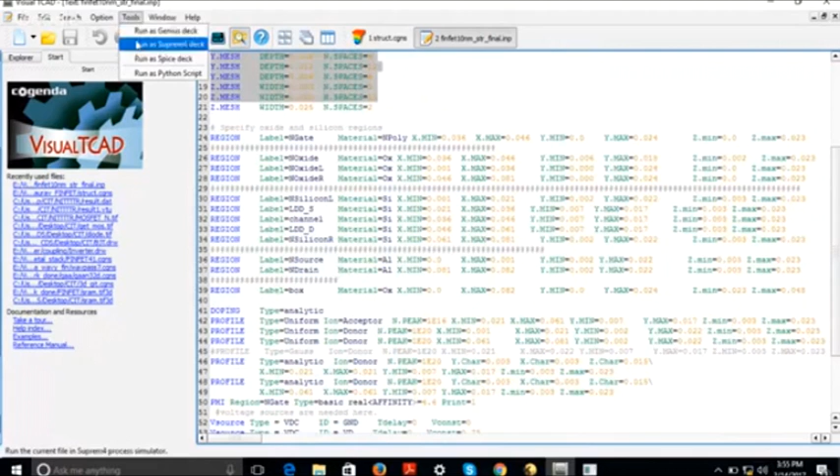So we get the results after simulation, meaning the structure will be like this. Now, if we want to make a 3D circuit for fabrication, the primary requirement is layout - like this is one of the inverter layouts. If you want to fabricate this layout, first of all we require a mask. This layout we are free to design in any of the standard tools like K-layout, Cadence, Mentor, Synopsys, any of the environments. We require a GDS file.

Then this GDS file we give to our module, GDS to mesh. Here we add the file like this. This is the D flip-flop, half adder. Let's take the half adder.

We select whatever process we are providing, up to 12 nanometer FinFET process. So here I'm selecting 180 nanometer currently. And create a mask - half adder.

This is a half adder layout. Now once I click on generate mesh, the software will implement all the 180 nanometer process parameters on this mask and make a 3D structure of this half adder.

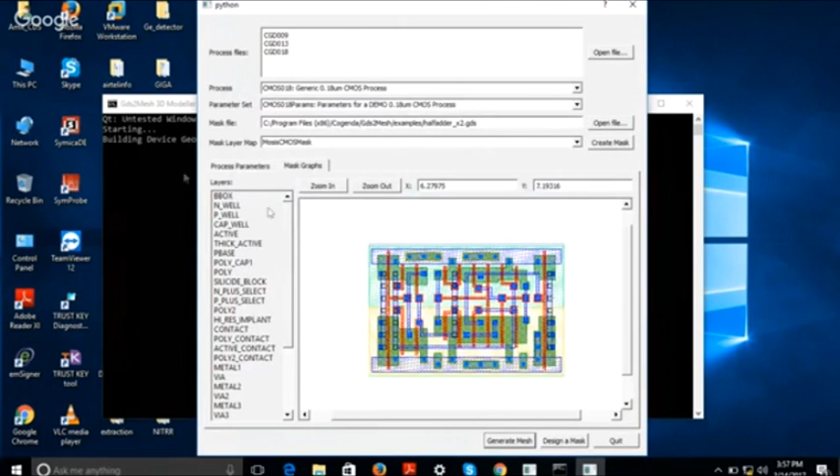Like this, it will start building the structure. It will take some time. So what I'll do is show you what kind of structure it will give as output. I think I have already shown you the SRAM structure. Making the 3D structure for the half adder will take around 15-20 minutes to simulate. By the time that finishes, I'll just show you the SRAM.

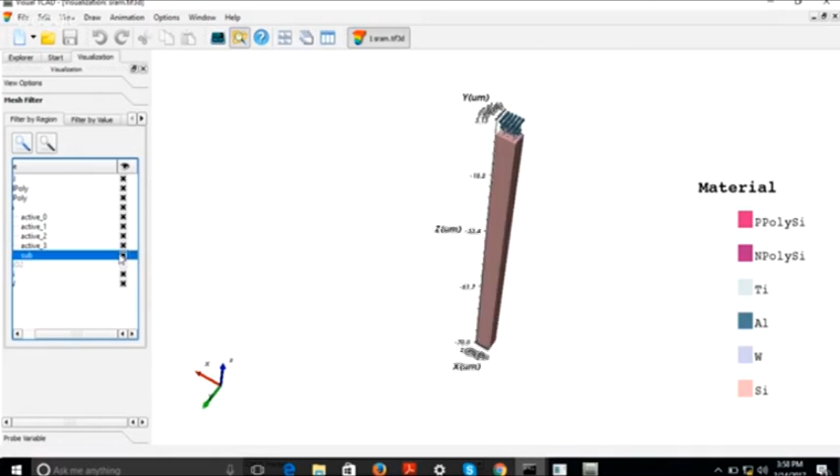The structure will be like this. This is the output format for GDS to mesh - meaning this kind of advanced structure is possible only through layout. It has 6 transistors with multi-metal interconnect, vias, pads - everything is available here. So this is the output of GDS to mesh. GDS to mesh gives us an environment where we can fabricate our layout.

This is all about this session. If you have any query, please feel free to ask.